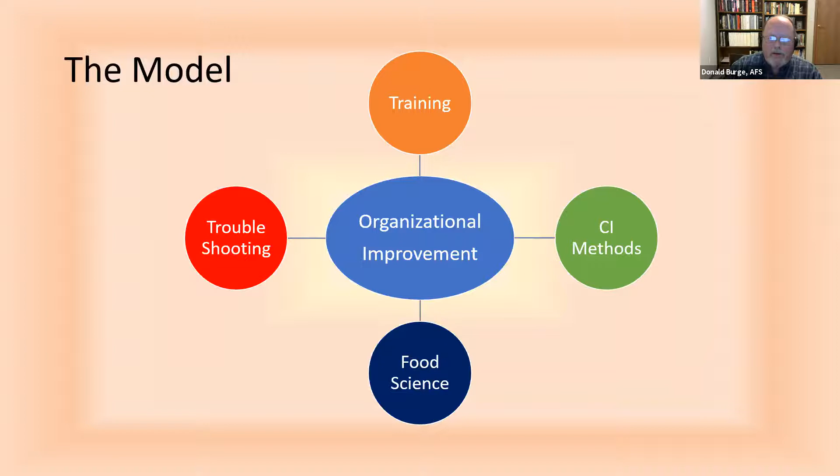This is the model for the organization. It's all about improvement. The food science part is where the business started, that's probably not what this group's interested in. So I'll talk a little bit about troubleshooting, training, and continuous improvement methods, but rather than go through a nice boring bullet list about all those things, I decided to tell a little story about a very important part of continuous improvement.

Well, in 1975, along came a thing called the oil and gas crisis. Gas goes from a reasonable 33.9 cents per gallon to 109.9, $1.10 - the terrible price. All of a sudden, everything changed, and this is what it changed to.

This is what came in - they were small, which meant originally they were never very good in the American market. So they get about 25 miles a gallon. Now that's triple the price of gas, but you've got triple the mileage.

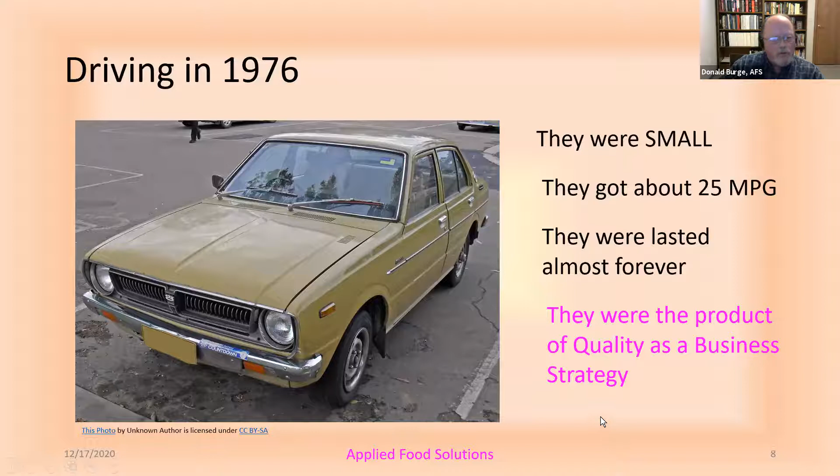Also I should mention, another important part of this change was automation. We'll talk a little bit more about that in a little while. I think people will bring that up. Thank you.

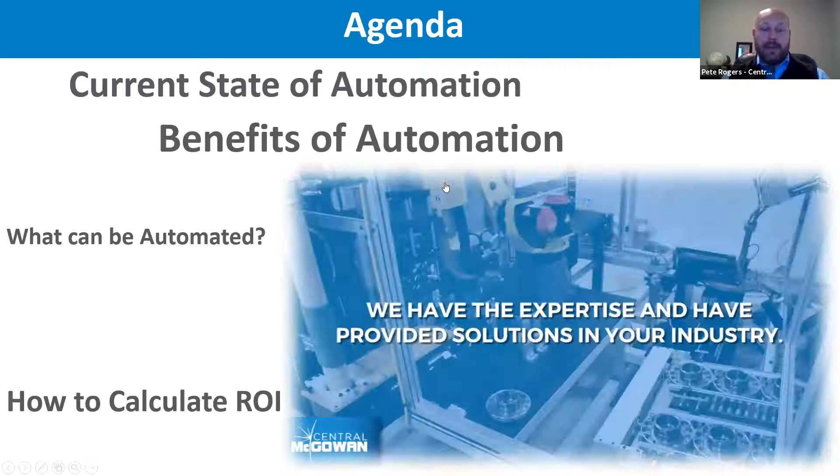This presentation is about why automate. So the agenda of this presentation, I want to cover 4 main topics: the current state of automation, the benefits of automation, what can be automated in your facility, and how to start calculating an ROI.

So we can get rolling into the current state of automation, and this is more of a global look at automation - not just regionally, not just in the United States, but globally. In 2019 was a good year for automation in North America. It was up just about 1.6% over 2018, and in the US alone, we installed 33,300 arms.

This year, it's obviously been tough. Capital spending amongst COVID has declined quite a bit. So through August, it was approaching 20% off as compared to 2019. But the big thing here to look at is how the US stacks up against other countries.

So we installed 33,000 arms, and we're number 3 in the world. Japan was close to 50,000 arms. But China is 140,000 arms, and it's quite a drastic difference there. China actually put more arms in than the next 5 on the list combined. So it's a little bit strange, but you kind of think back on why some of that is happening.

2.7 million robots currently around the world are working in factories. So that's a pretty good number. Can get a lot better.

So if we look at how many robots were installed, the next thing I want to show you here is how does that stack up. There's an interesting stat here. If you look at Singapore or even South Korea, they have close to 10% of their manufacturing workforce as robots. So what this chart shows is number of robots installed per 10,000 employees. If you look at Singapore, they're at 918 robots per 10,000 employees.

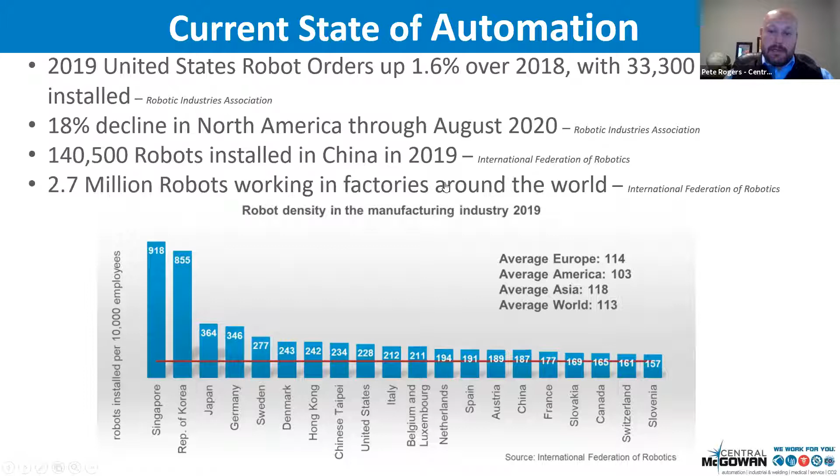So essentially, what's going on in China is over the years, since they've gotten so much manufacturing, their economy is growing. The quality of life's growing, and so is the cost of labor associated with that. And because of that, over the last 5 years or so, we've seen a lot of reshoring. The reshoring is happening because automation is getting to a point where it's cheap enough now that if you automate in the US, you can very easily compete with the lower labor costs in China.

Some of the downfalls with China and offshoring of manufacturing is you've got to do large quantities. You've got to fill a whole shipping container and get it shipped across the ocean, so you have a lot of inventory. You lose a lot of control of your process and your quality. A lot of companies found out they lose control of their proprietary information. So being able to automate in the US and win back some of this manufacturing work is really a trend we're seeing right now.

China's realizing that everybody else is automating and they're losing a lot of this manufacturing work. They need to start automating or they're going to be making nothing in the near future. That's why they are buying robots as quick as they can be produced. For example, there was 33,000 installed in the US, while one company in China had purchased 39,000 arms in one shot. The government is highly invested in this, very tied into business in China with the way it's set up over there, and they see this as the future of keeping the economy and manufacturing going. So they're automating as quickly as they can to keep up with North America, Europe and others. We're somewhat in a race to automate and keep our systems efficient and flowing, and retain manufacturing work.

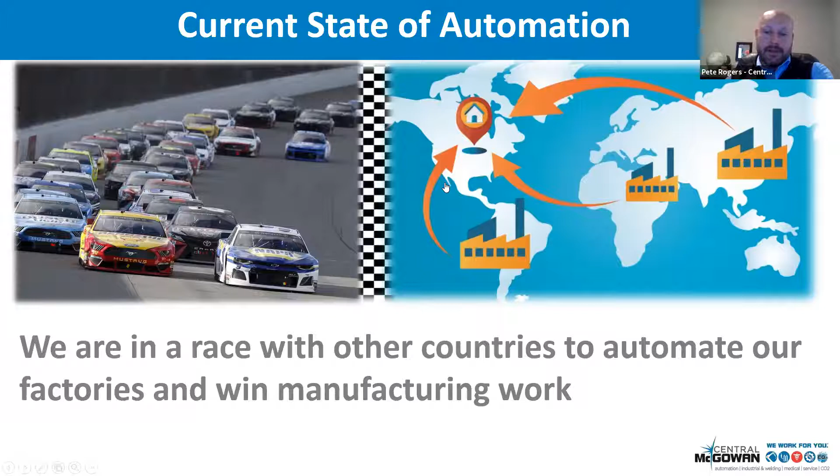The next part I want to talk about is the benefits of automation. Some of the benefits of automating in your facility consist of part consistency. You take some of the human element out of it. We all have good days and bad days, and part quality can vary depending on that. Automation can also help reduce a lot of rework with parts because of the consistency, so rework goes down, scrapping of parts goes down, and there's quite a bit of cost associated with that in certain processes. So automating it and getting it very fine-tuned can really help you on the part consistency side.

One of the biggest things, this year shook things up a little, but the problem is still there underlying: there's a huge labor shortage. Middle of 2019, the unemployment rate was low enough that basically nobody was looking for work anymore at that point. Some of the biggest hindrances to a company growing or getting to the next level is the fact that they couldn't hire enough people to even produce what's needed to grow the company. So filling in gaps in the labor shortage with automation is a big deal. You can put a robot in an area that's really redundant, very easy, and utilize that employee in a different part of the facility. You're not actually replacing an employee, you're relocating them to an area where it's much more value added to your process.

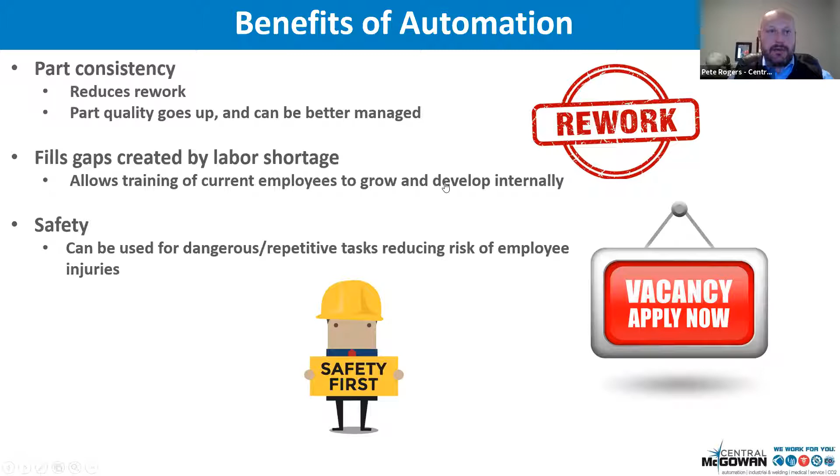Some more benefits are increased throughput. It's kind of the tortoise and the hare, but imagine even slowing your part process down a little. Say it takes you a minute to weld a part, even if the robot were to take a minute and a half or a minute forty-five, but it runs part after part after part, no breaks, just keeps going. At the end of the day, you actually find that the robot's producing more parts. We all know you probably produce a lot more in the morning when everybody's fresh, but as the day drags on, people wear out over time, especially with rigorous work, and your process slows down by the end of the day. That can be one of the benefits of automation - it completely runs the same pace nonstop.

There's also abilities to be able to queue up large amounts of work. Imagine all you do is run an 8-hour shift in your operation. You might be able to queue up 2, 3, 4, 5 hours of extra work for the robot system. When you leave after your 8-hour shift, you shut the lights off, and when you come in the morning, you have all that extra work completed. Not all operations can be set up like that, but there's a lot that can, so you can extend how long you're actually producing parts per day.

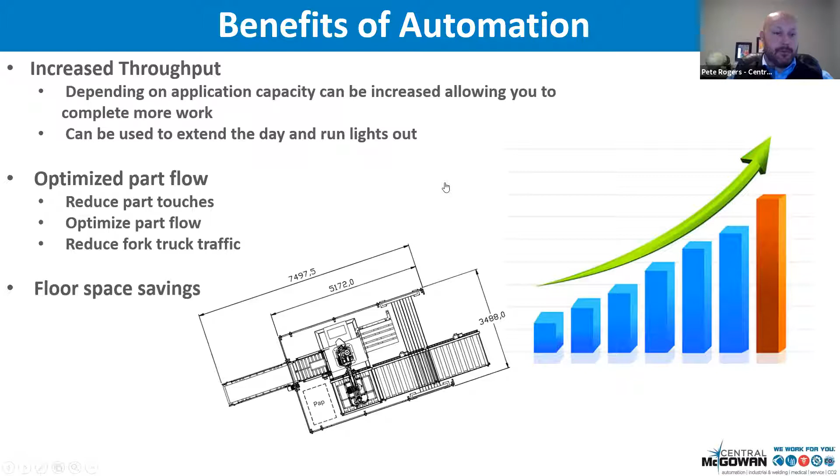So moving on from some of the high level benefits of automation, I'm going to give you a high level now of what can be automated on your factory floor. There's a myriad of different processes. Starting off with assembly processes - taking small parts and putting them together, part after part after part after part. These systems can be more high end.

They're more expensive because there's a lot of dexterity that goes into these systems, but they can also be very valuable because what comes with a lot of these assembly systems is in-process quality. You can use vision systems or other sensors to not allow you to assemble something incorrectly. As you or I assemble something, there's a chance we could do something wrong, and automating some of those processes takes that quality control and puts it right into the process. There's a myriad of different things you can do in that world.

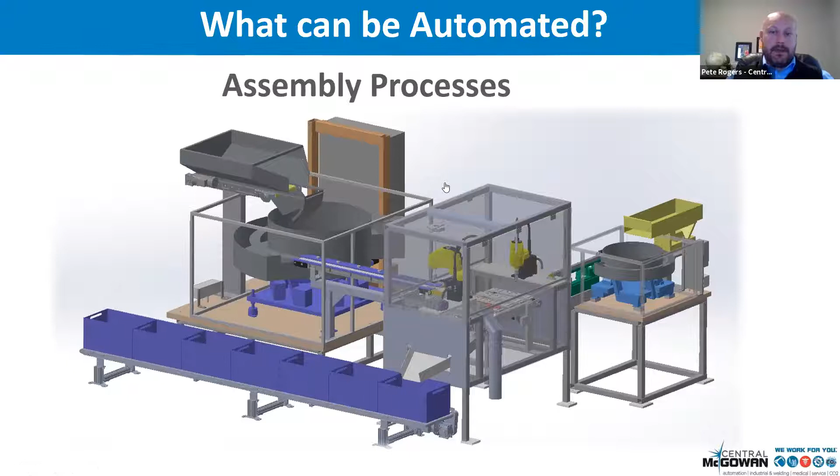Moving next into welding, plasma cutting - this is a big one that's out there. Welding's been a very established automation application type for many years around the country. This is being used heavily in the auto industry. Welding is a big one that can really improve weld quality, since welding is very dependent on the operator having a good day, paying attention, and making sure they're putting down a good weld.

The robot, once programmed and brought in, can handle parts that are heavy, spun, turned, flipped, moved into position very easily, which can reduce how much time it takes to create a part. If you imagine a large part that needs to be rolled over five times, requiring a welder to use a jib crane and hoist to flip it over, in an automated system you can literally set that part down and spin it with a programmable servo motor that the robot controls. This ensures your weld is in the correct position, and also a very consistent weld quality.

The interesting thing about robotic welders versus a hand welder - and they're bringing some of this into hand welding now - is the robotic welder is a closed loop system. So if you're telling the welder you want 25 volts coming out of the gun during the entire weld, if it senses that's going down or up too much, it'll automatically adjust on the fly. What it's really doing is putting as consistent heat input into that weld as possible.

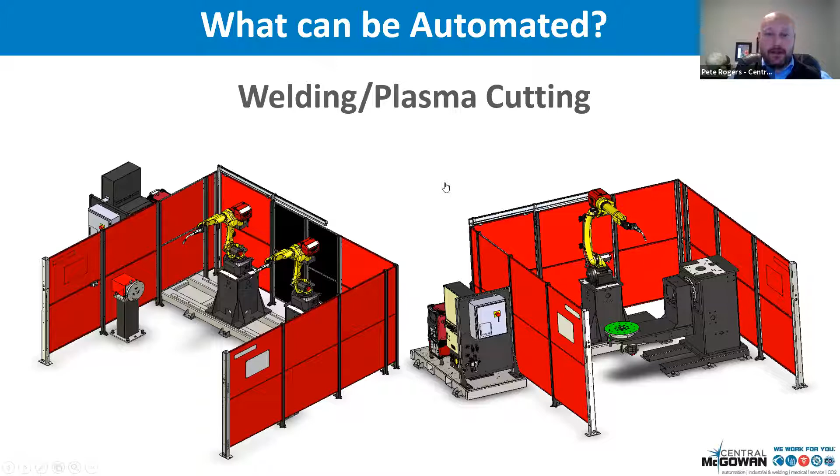Plasma cutting can be automated as well, and there's a lot of benefits to that. You can automate flat sheet plasma cutting, as well as beam and tube and pipe and all kinds of different things there. So one of the new things that's come into the market, and I'm sure you've all kind of heard the term, is the collaborative robot or cobot.

These robots are unique. The one I'm showing here is actually a welding application, but you can use it for a lot of different applications outside of that. The cobot itself is a robot that you can work next to. You're going to see in some of these slides these robots move very quickly and handle very high payloads, so there's a lot of safety involved around them - they're fenced in so you can't accidentally walk in front of it.

Cobots you can work next to. They're set up with high-end sensors in the arms so that if it bumps into you, it stops, and they don't exert a lot of force. Cobots are a little bit slower as far as top speed, because once you get too fast, that bump isn't so much of a bump anymore.

This is a big thing coming into the industry, being able to do very simple welds. The cool thing about these cobots versus the standard industrial robot is you can grab this robot with your hand, move it into position, teach the start point of a weld, move it to the next position by hand to teach the end point, and then hit start, and that robot will play back exactly what you just did by hand.

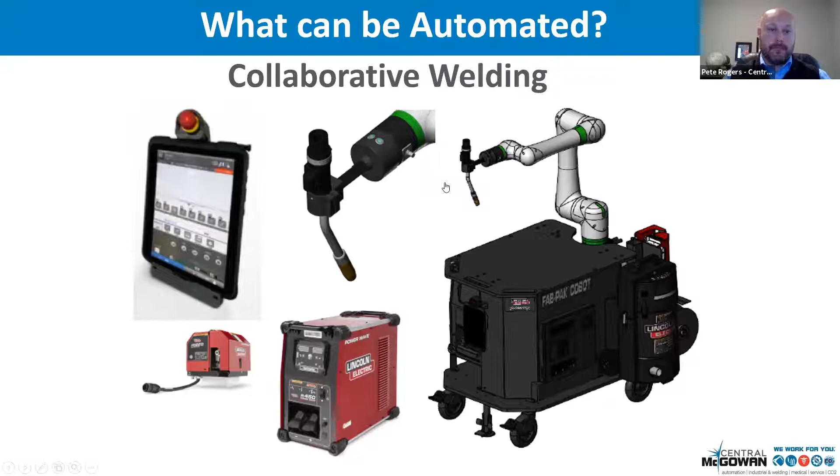The next one is palletizing, end of line palletizing. You envision a box running down to the end of the line and an operator picking it up and stacking pallets all day long. I'm sure there's a lot of it out there, and some of you are familiar with it. This is a very good area to automate. Not only does it save safety ergonomically from lifting boxes all day long, but the cool thing is you can put multiple zones on this.

For example, the system you're looking at here actually has 6 different pallet locations. They'll run up to 5 different part numbers at a time on the same inbound. And it's as simple as a barcode scanner - it reads the barcode on the box and the robot knows which stack it needs to go on.

The other neat thing about this system is phase 2 is actually to stack these boxes on a pallet, but raised up in the air about 4 feet. What's going to happen in the future is an automated guided vehicle, an AGV - a robot forklift essentially - is going to come over once the pallet is full, pick it up and bring it to the next area and set down an empty pallet. So this is automating these little pieces, helps link processes together and makes everything more consistent so that maybe you can bring in automated fork truck traffic into your facility.

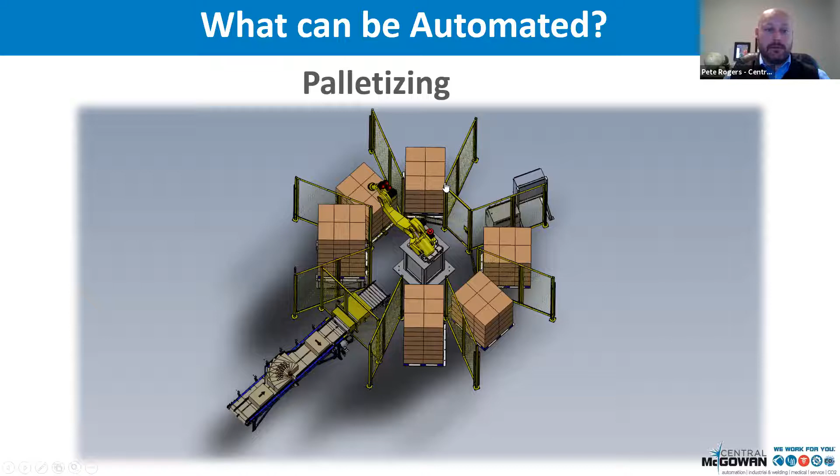Material handling, this is a big one, and machine tending. So you envision all the CNC machines out there in machine shops where you have operators lifting parts off of pallets, loading a machine, hitting the start button, right? This is a process that can be automated fairly easily, replacing the operator with a robot.

The biggest bang for your buck on these is the heavier the parts get. There's a lot of machine tools out there that are loaded with a jib crane or some sort of hoisting device because parts are too heavy. The robot can easily swing over to a pallet, use vision to find the part, pick the part up and load the machine. And they are completely Ethernet connected now to most of the new machine tools, so the machine and the robot are talking, and once loaded, it can tell the machine start. The machine can run through its process, open its door and tell the robot, I'm done, come pick it up, and continue that process.

In this example on the screen, they're actually picking a part up, loading a laser marker, and then putting it on an outbound conveyor. The small part on the screen used to be on a pallet, picked up by an operator, set in this door you can see through here, and hit start, then picked up and placed back on a pallet. What they did is they actually tied these conveyors you see going in and out of this system to the process that's upstream and downstream. So now the process it comes from, which is some machining and assembly, flows down one conveyor, gets marked, and then flows back out to go into the next assembly process. Very streamlined again.

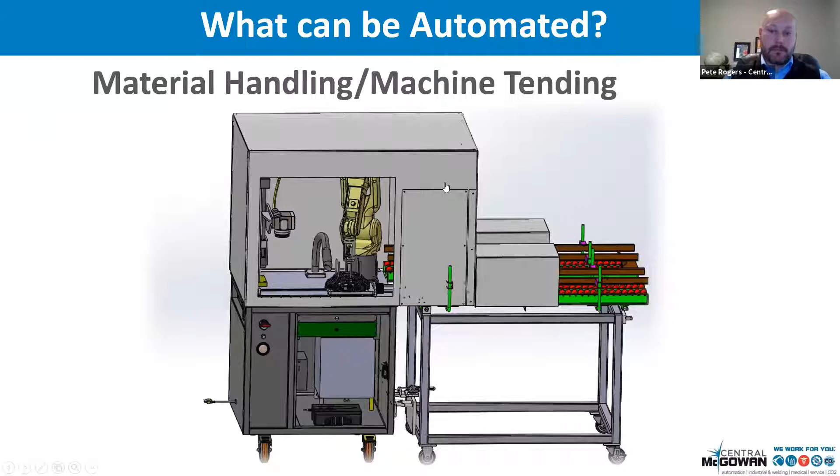Material removal processes - what these are is polishing, grinding, deburring, maybe some cutting. This system here actually used a router to cut some aluminum panels for this company. And these processes can be automated. There's a lot of homework and a lot of work that goes into a material removal process.

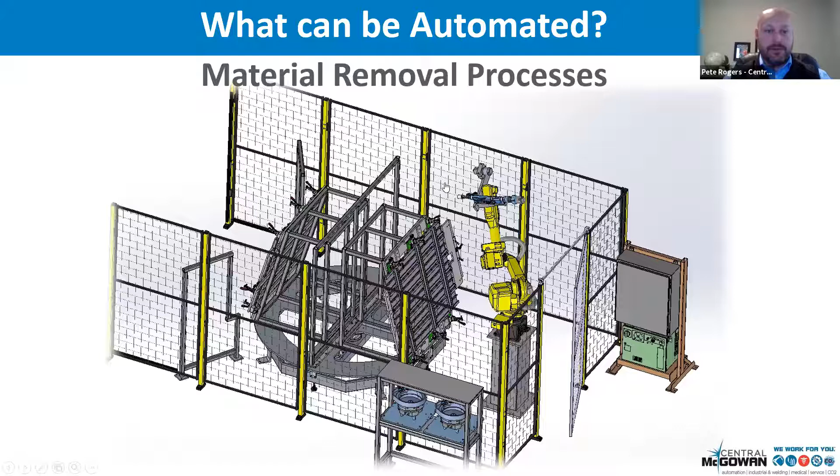Mainly because if you think of welding, there's a pretty strong accepted spec in the welding world that a quarter inch fillet needs to fall within this spec. When you get into the material removal process and when you're deburring, a lot of times there's no set spec that says it needs to be X, Y, and Z that's kind of accepted by everybody in manufacturing. So there can be a lot of testing involved with this, and also trying to figure out what kind of media is correct, maybe for cutting, polishing, or grinding.

These processes can be hugely beneficial, but they do take a little bit longer and tend to be on the more expensive side, but can have a huge return in the end if the right steps are gone through.

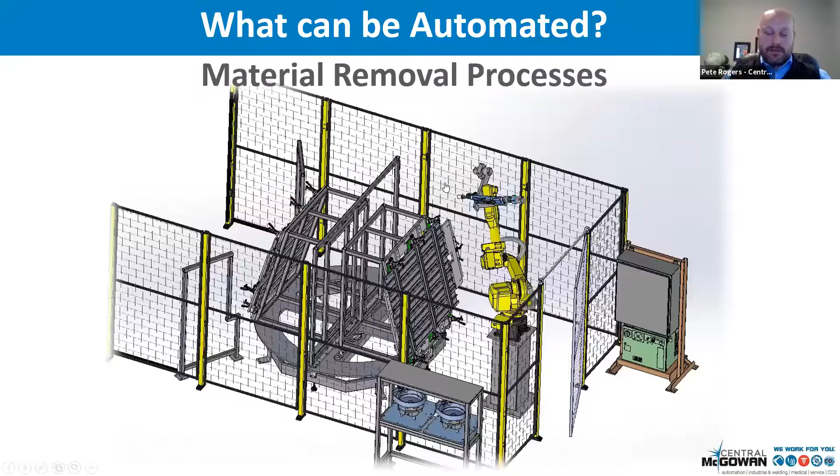So I spoke a little bit about return. I want to give you guys some things to think about as far as where do you start? How do you calculate an ROI? What are the things I should look at?

Obviously, some of the easiest things that come to the forefront of everybody's minds is what kind of labor savings on this process, right? So you're going to want to calculate labor savings. A lot of these robots can run unattended for long periods of time. So what you need to figure out is, if I'm taking a welder away from this process and putting them into a more advanced weld that's tougher for a robot to do, and using an operator to just make sure this machine is being run and attended to and continues to have work to do - what labor savings are involved with that? Is there a lower cost to the operator versus the welder? And in a lot of instances there is.

So that really helps out. How much time is that operator spending at that one system during a shift? Do we have the automation set up where the operator might be able to tend 2 or 3 systems throughout the day, depending on how long the system can run unattended? So you're going to really want to dive into some direct labor costs.

Productivity gains - this is a big one. We talked about it a little earlier with some of the benefits, your increased throughput. What are we looking at? Depending on what your forecast is in sales and what you're doing there, what you don't want to do is buy a robot system that only does what you're doing today. If you're planning to grow, you want to look at this and say, I want a system that's able to handle 30% more, 25% more than we're doing today, so you give yourself some room to grow without the added investment right away.

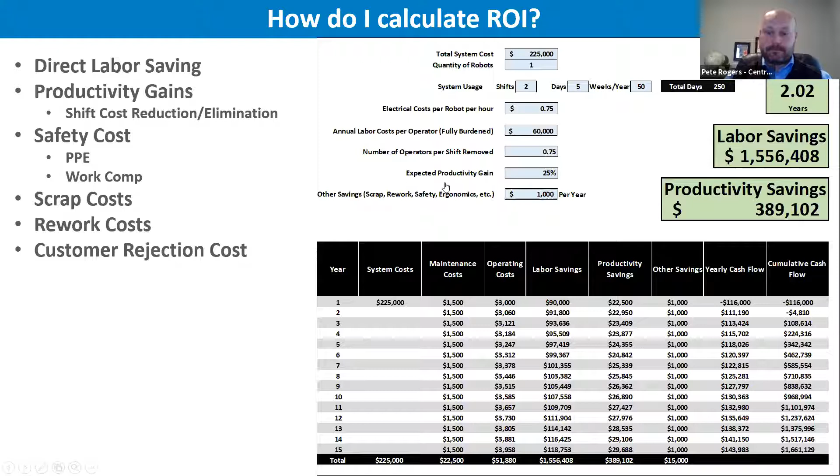It was kind of funny that we segued from the Japanese automaker. A lot of these robots are Japanese made, and they're very high quality on the mechanical side. So with that, I'll open the floor to any questions.

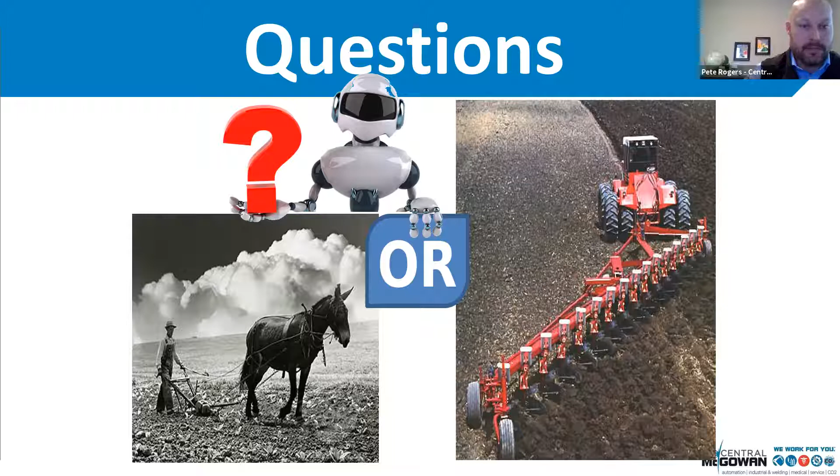Yeah, so guys, these are systems that Central McGowan has done in the past. I'm just going to talk through a couple of the different things they're doing - some of what can be automated, but in more real life. I'm going to give a high level description of what's going on in the system and just let you guys kind of see them running.

So is it good to start?

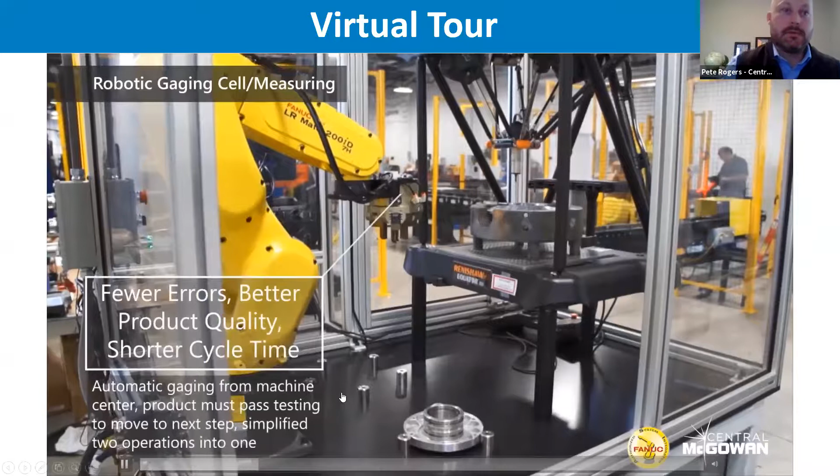One of the benefits of automation, when I was talking about part consistency and quality control in assembly processes, is bringing that into the process. This system here is literally a robot picking up a part, setting it into a small CMM, and getting measurements on it. You'll see two locations where the part can sit, getting swapped in between a process. A robot's loading one station while another robot's unloading the other station. So this robot's job is to pick the part up, put it in a gauge, and measure it.

Some cool things happen with a system like this, especially in machine tending. Imagine you machine 700 parts, then gauge a couple and find out 200 of those parts had a bad tool in there and they're all scrap. This allows you to measure every single one, and if you do find a scrap part, you can shut that machine and process down immediately. So you might end up with 2 bad parts, or however many are in queue, instead of 200 at the end of the day.

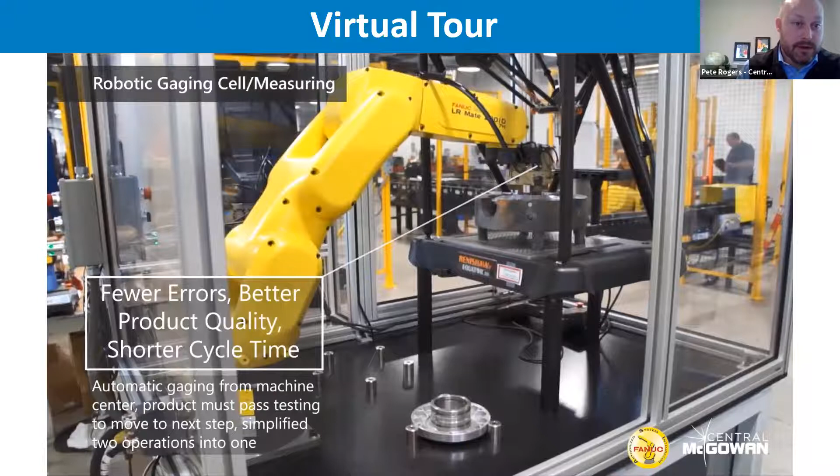This is a big thing with the cost of inspection equipment like CMMs coming down - it's allowing you to 100% QC check all machined parts and really have control over scrap. Instead of scrapping a large batch, or finding out half the shift that day something was wrong with that machine, it allows you to narrow that down to every single part and really control those costs.

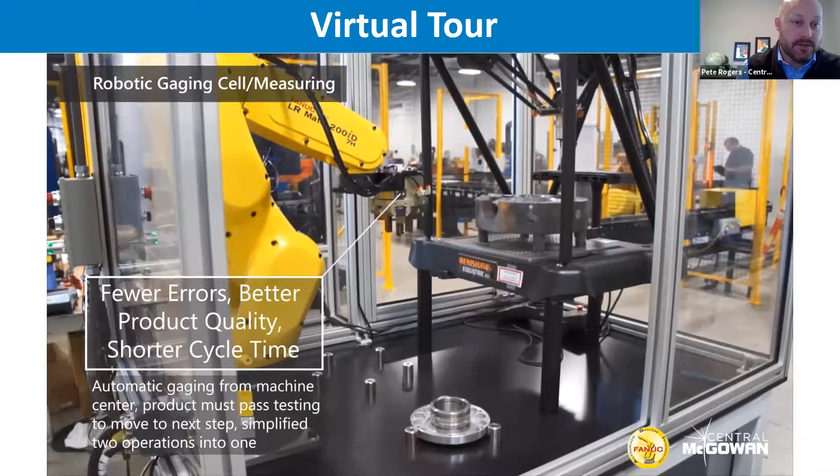We've seen some processes in the past in machining - really high-end, very delicate - where their scrap rate paid for inline QCing of it. If they could eliminate 80% of their scrap by doing this, it more than paid for a robot to be double checking the part measurements right in process. That's a very cool concept, and it brings you closer to lean manufacturing or single part flow.

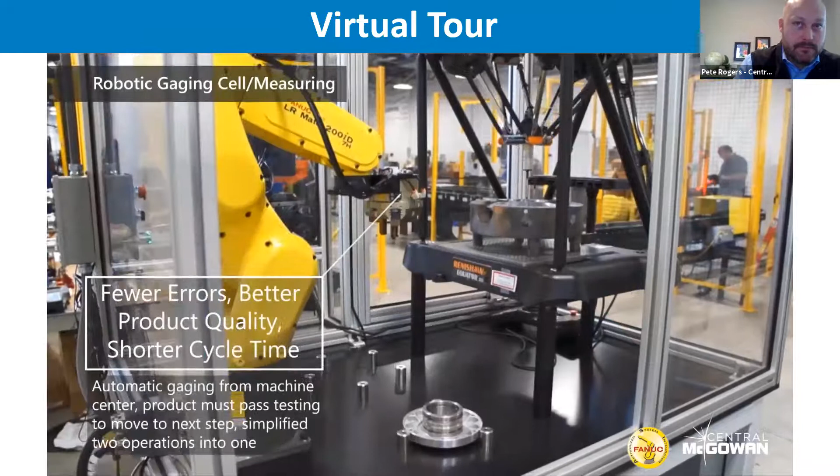Lots of different possibilities with this too - square tubing, round tubes, I-beams, anything steel or metal you can get in there to start cutting. You can put a plasma cutter very easily on the end of a robot and let it do the cutting.

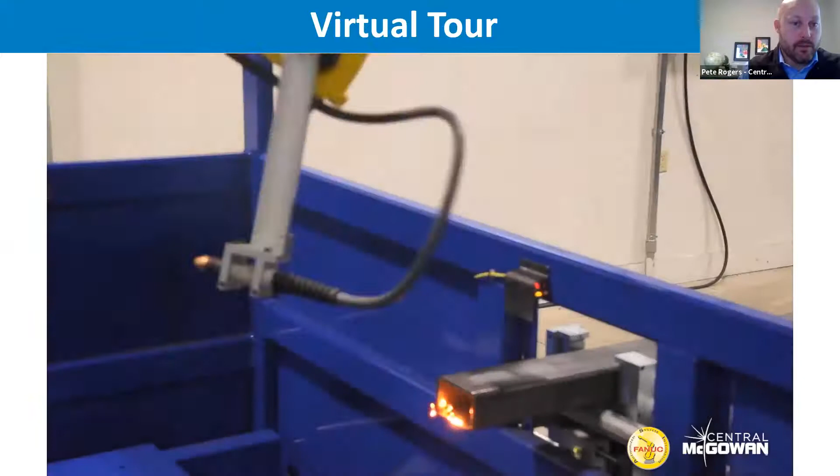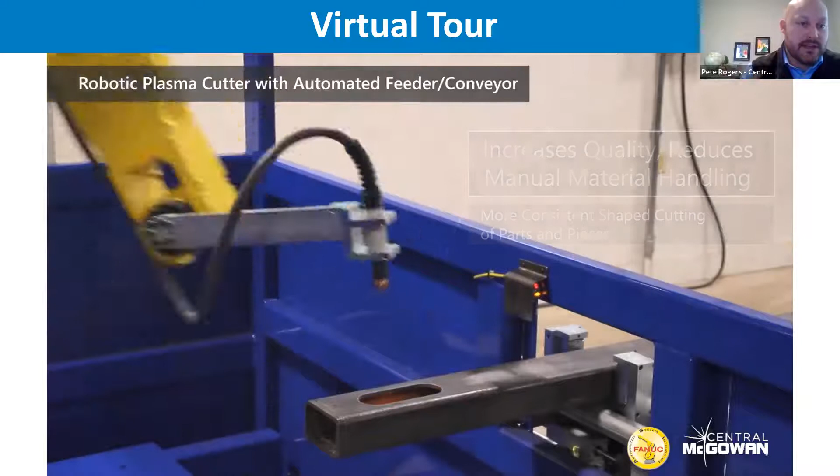The cool thing nowadays is everything shifting towards the 3D CAD world. There's still a lot of drawings out there that are 2D, but a lot of people are moving into the 3D world, and there's a lot of offline programming software. Historically, you'd need to teach the robot to run the path you're seeing it run. Now there's software out there where you can load all of this in virtually, given a 3D model of everything, and it shows exactly how the robot runs and does that.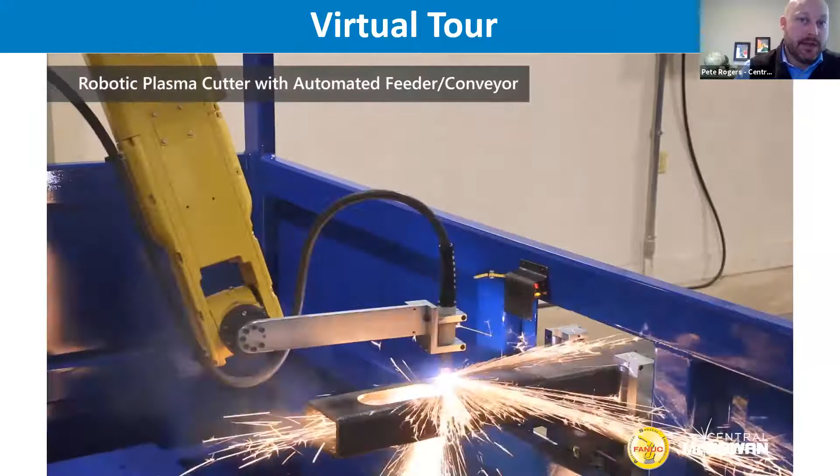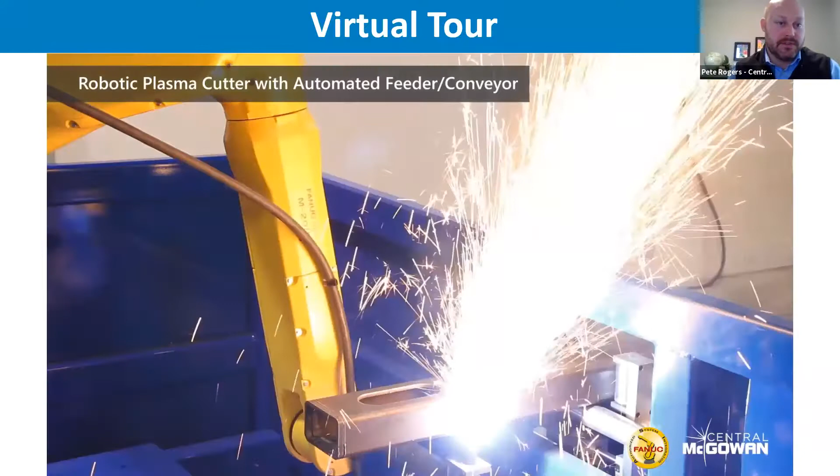You calibrate the real system to the offline system, and from that point on, you can load in the 3D CAD of the part you want cut and tell it to program this part, and the software will program it for you. You bring that file out to the robot, load it in, do a couple test cuts, and you're cutting it. So instead of shutting production down to stand there and teach new parts or add parts to a system, you're able to do that from a desk while the robot's running production.

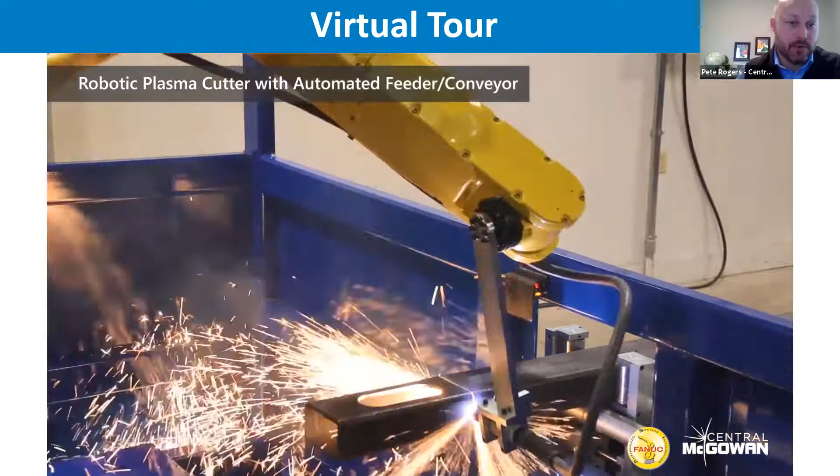If the robot's not running production, you're not making any money on it. So to be able to program something offline and have the robot shut down for 10 minutes instead of a half a day, that's huge.

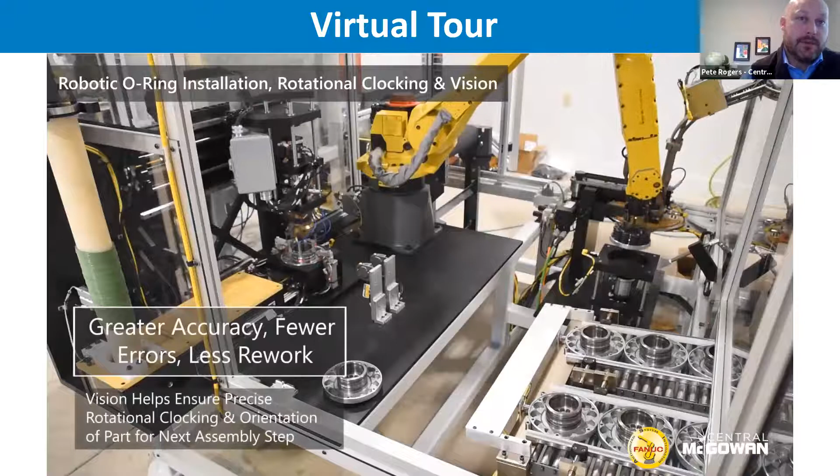Historically, without vision on a robot, if you don't set that part in the exact same spot for it to pick it up, it's only going to the spot you told it. So now the advances in vision, whether it be 2D or 3D, allow you to be a little less rigid. The robot finds the part, maybe there's clocking needed, like a notch or a keyway on a part that needs to be set right relative to it when assembling. The robot can find that. We don't have to find a fancy way of making sure that part is rotated properly each time.

So this is a very cool example of doing some assembly work that we talked about earlier.

This is just a fun one to watch, but these are ceiling tiles, like you'd see in an office. This is a cool example of a robot doing cutting in process. The coolest thing about this is the part never stops moving.

There's options now called line tracking, where you can put a robotic encoder, which gives feedback of speed and position to the robot. It's the same thing they use on the robot's own motors, but you can mount that to a conveyor, a press brake, or a myriad of different things, and the robot knows the exact speed the part is running and can do its process while the part is moving.

This robot, and it's tough to tell in this video, makes a perfectly square cut even while the part's moving. The cool thing is you don't have to stop, make a square cut, start again, stop. This thing just does it on the fly.

So there's a lot of things out there now that allow increased throughput in robot systems because you can keep the part moving. For example, that first assembly system I showed in the what-can-be-automated section of my presentation, those parts were all being placed onto fixtures, 4 fixtures on 13 different rungs on a conveyor, and it never stopped moving. Those robots just kept assembling the pieces as they moved down, got crimped together, and dropped in a basket, but they never stopped. Some really cool options there as well.

Got one more video for you guys here. These videos get pretty limited out of our automation group because there's a lot you can show, or some you can show, and a lot that customers ask you not to. This one here is actually depalletizing. We talked a little bit about palletizing in the presentation where we're stacking boxes. This is actually taking a pallet that's come into a customer with a whole bunch of wood stacked on top of it, and it's depalletizing the wood.

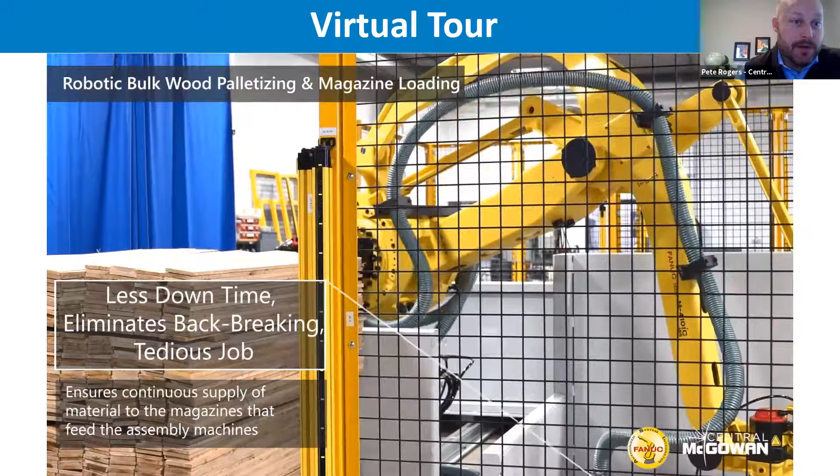It's putting the wood into a cartridge that is then feeding a machine that builds pallets, so those are slats for a pallet. This allows you to feed an assembly machine with a robot without having to have somebody stand there and take wood planks off of a large pallet all day long.